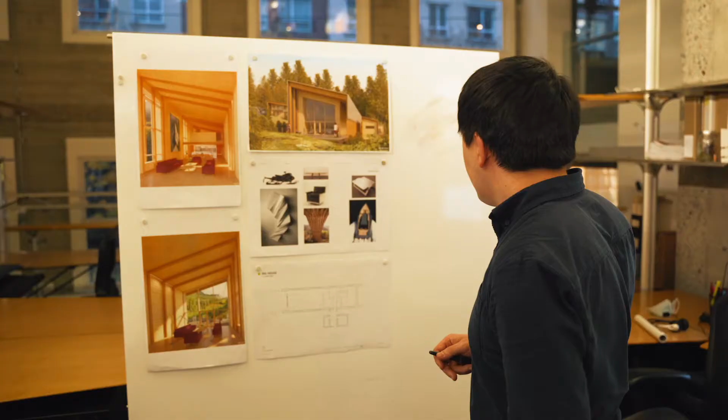Solo was born out of a deeper understanding of the impact buildings have on emissions, climate change, and health and well-being. This project afforded ourselves and the broader project team an opportunity to test ways and means to achieve net zero, both in embodied and operational emissions.

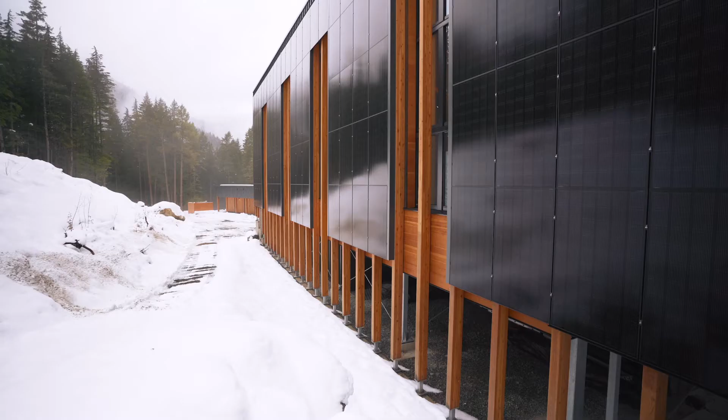Our president, Bruce Langereis, has coined the name Solo as a nod to its isolated location in the lower Soo Valley, but also as a reference to its zero emissions profile and the fact that it stands alone as a one-off example as a future way to build. Solo represents a new way forward for Delta land development and is a catalyst to help accelerate change in the broader development and building industry.

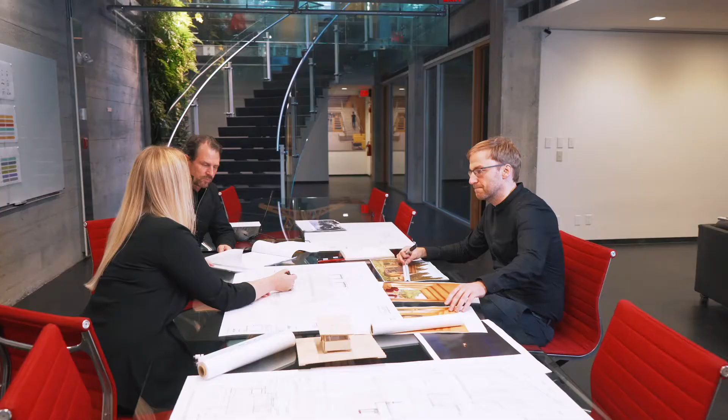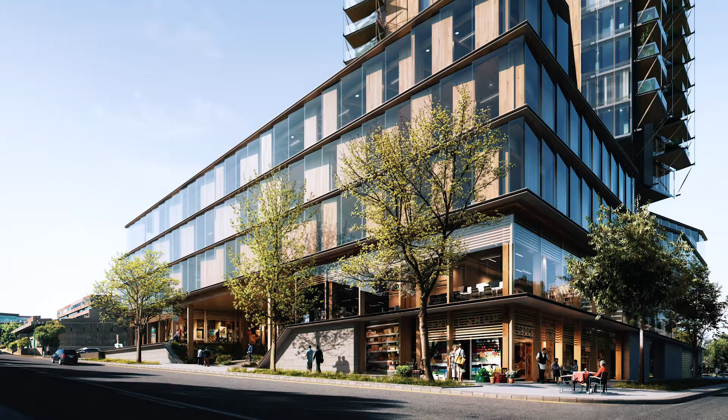Delta was looking for an architect that shared their alignment of values, and that's what led them to reach out to us. Our studio, Perkins and Will, are really known for our reputation in environmental stewardship. We started our work with Delta by creating an overarching set of principles and goals that would lead every decision made on the project. Delta wanted to test out not just the mass timber construction methods that had been proposed for Canada's Earth Tower, but also the broader set of principles and goals around holistic design.

This includes everything from eliminating harmful materials used both in construction and finishes, minimizing our energy consumption through high-performance appliances and fixtures, while also generating energy on site, and reducing emissions. The building structure is beyond carbon neutral, and the building does not rely on combustion for operations. Solo is a proof of concept. It proves that buildings can counteract their negative consequences and act as a source of repair.

Delta wanted an open layout, something that would serve both as a single-family home, but also be able to host large groups for events, gatherings, and educational purposes. Beyond just a house, Delta really wanted to make a statement. They wanted something with wow factor, something that would celebrate the natural beauty of the site and prove that building sustainably and to the Passive House standard doesn't mean sacrificing design aesthetics or beauty.

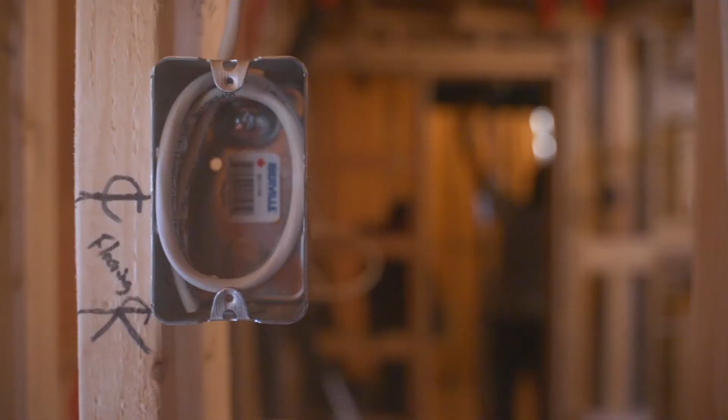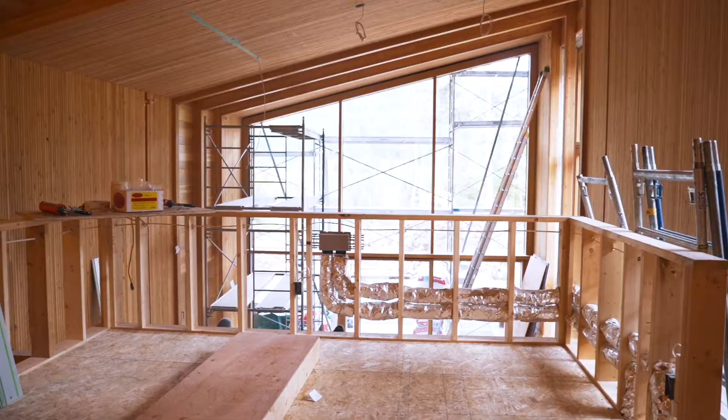The remote location of the site drove all of the design decisions, from building siting and construction methods to the interior finishes. The remote nature of the site led the project naturally towards prefabrication and modular construction methods. This allowed the panels to be built off-site in the shop during the winter months, and then to be erected quickly on-site during the shortened building season.

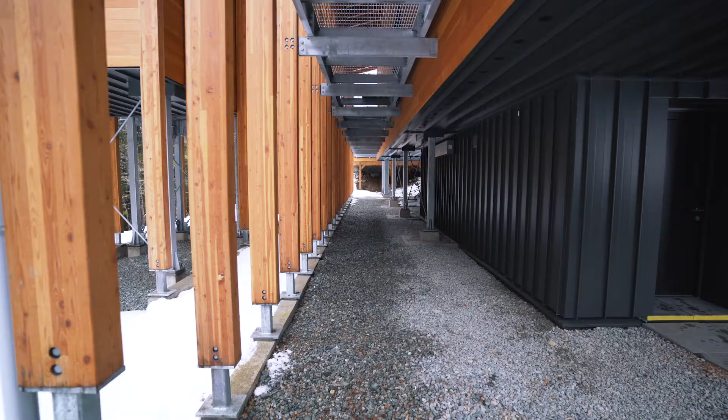We designed Solo to have a performance-led aesthetic. It contains a limited material palette and contains architectural features that are authentic and unsentimental. The building sits on a raised platform above the uneven terrain of the site. It touches the ground lightly and allows nature to remain the focus. As you walk up the front steps, the covered walkway frames a view to the mountains beyond.

Wood was chosen as the primary structural material. It was the obvious choice to reduce our carbon footprint, but it also provided flexibility for the prefabrication of the modular panels.

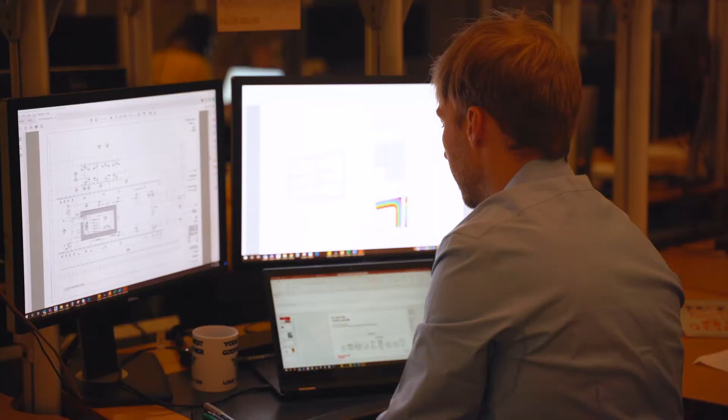The temperature in Soo Valley can get below minus 30 degrees Celsius in the winter and can reach levels above 30 degrees Celsius in the summer. So given these climate extremes, ensuring that the occupants are warm and comfortable in the winter and then adequately cool in the summer is very important.

So as an off-grid system, the building must be self-sufficient. Designing a high-performance building enclosure using passive house principles reduces the need to rely on complex mechanical systems. This results in a more resilient building, irrespective of outdoor temperatures or in the event of extended power outages.

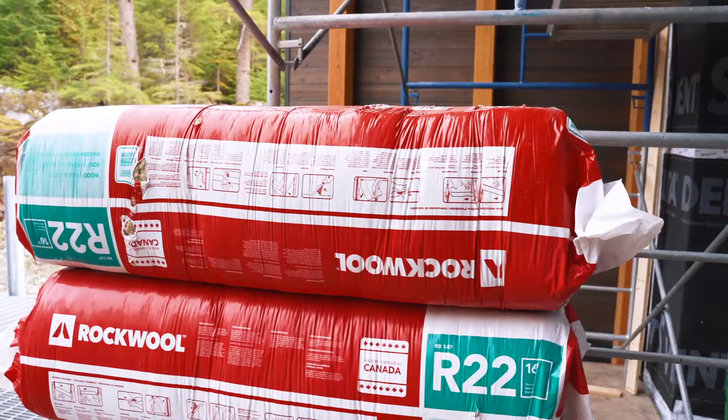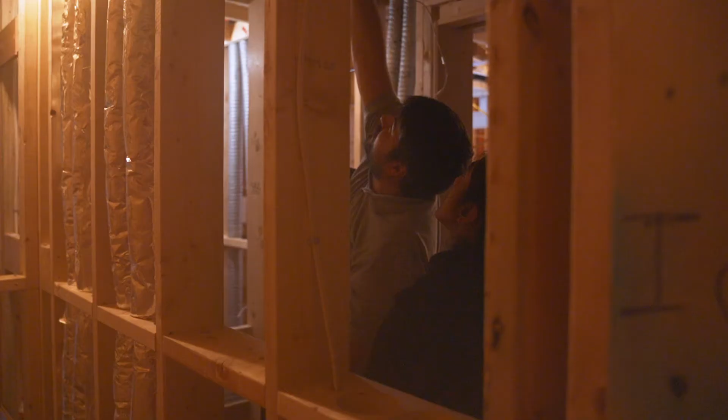Thermal comfort is guaranteed through a thick 2-foot layer of mineral wool insulation that wraps the mass timber structure, in addition to high-performance triple-pane glazing systems. Detailed thermal bridge calculations are carried out at design stage, and an air tightness blower door test is done at construction stage. These measures minimize heat loss, eliminate drafts, and reduce the risk of condensation buildup.

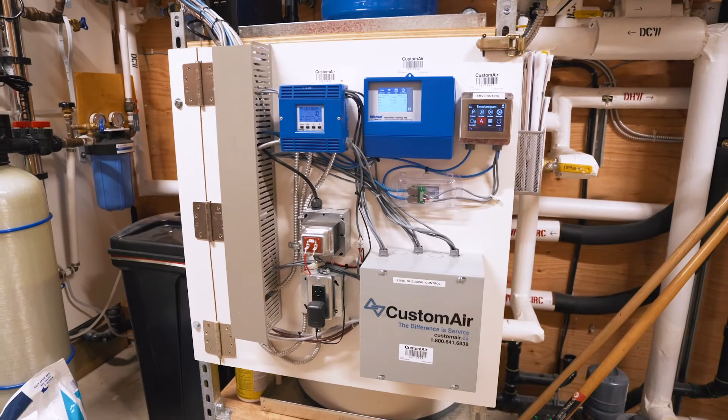The glazing design is optimized to maximize views to the valley outside and promote daylighting, while allowing sun in the winter and eliminating solar gain in the summer. A high-efficiency heat recovery ventilation system ensures a constant supply of fresh air, while recovering waste heat from areas like the kitchens and bathrooms. Natural ventilation is used for cooling in the summer, with windows judiciously sized and placed to promote cross-ventilation.

The small heating demand in winter is provided for by a radiant underfloor heating system. This is fed by a ground source heat pump that uses energy from the sun that is stored in the ground as heat. Energy is generated on site through the use of 103 solar panels mounted on the south facade. The vertical mounting allows the PV system to remain clear of snow in the winter when energy generation is crucial.

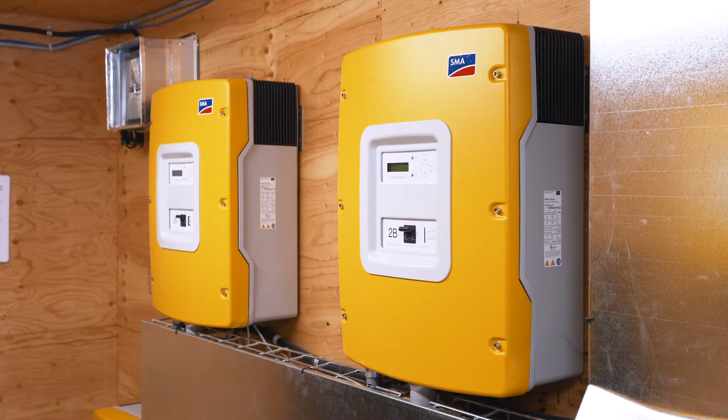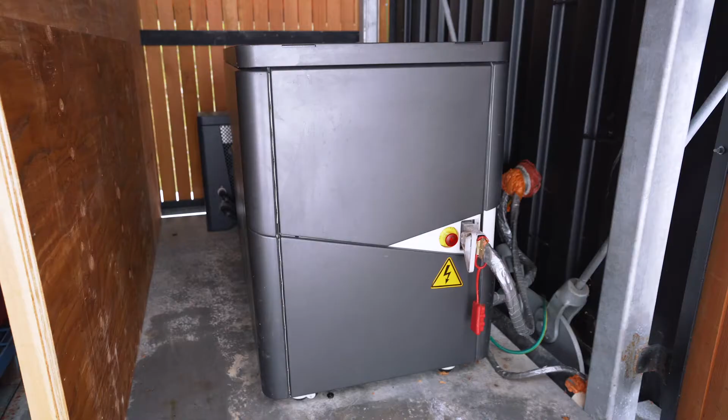The PV system links back to a set of batteries which store the energy generated. Being an off-grid site, we need a backup power source. This is provided for by the hydrogen fuel cell. This means that the building does not consume fossil fuels, nor does it require combustion to operate.

This results in a self-sufficient house that generates more energy than it uses and goes beyond net zero energy. It tackles both embodied and operational carbon and creates an innovative model for buildings in the face of the climate crisis.

The construction and operation of buildings contributes nearly 40% of global CO2 emissions, and it's broadly accepted that this has to change. Solo was our first opportunity to explore ways and means to get to a truly net zero outcome and radically improve on what has been done before.

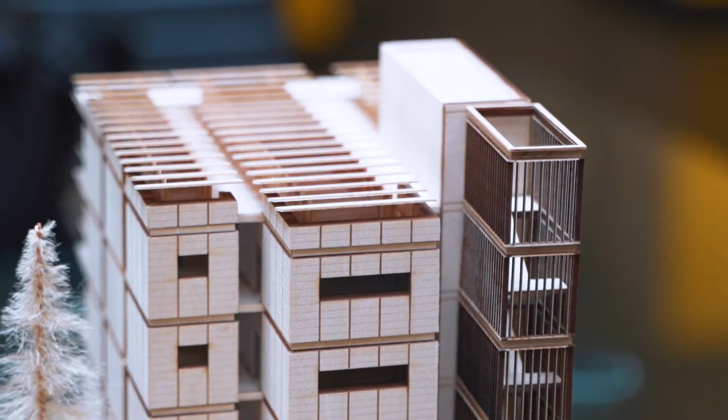At Delta Land Development, we've embraced a philosophy that prioritizes health and well-being, with environmental stewardship and building performance at the core of every development we undertake moving forward. As an industry, we need to develop projects that not only look at reducing the impact on climate change, but actually act as a source of repair. For example, through sequestering carbon in the structure, as we've done here at Solo through the use of mass timber.

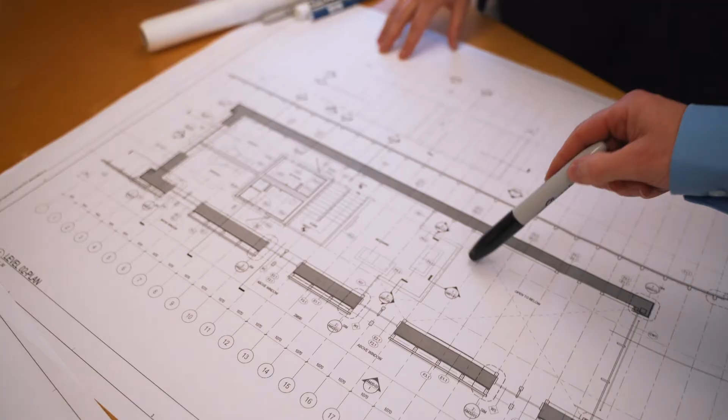Incremental improvement is no longer good enough to get us to where we need to be, and it all boils down to a choice. As we found here building Solo, there's no technical or even commercial impediment to achieving a deeply sustainable outcome, but also maintaining function and aesthetic in the process. Adopting principles such as passive house and the use of mass timber not only help reduce energy and emissions, but also significantly increase the quality and resilience of the building.

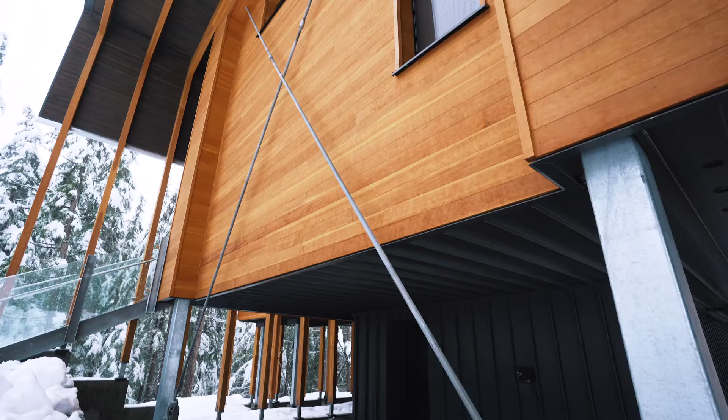A story in the making, at the start of something, later than we could uncover.

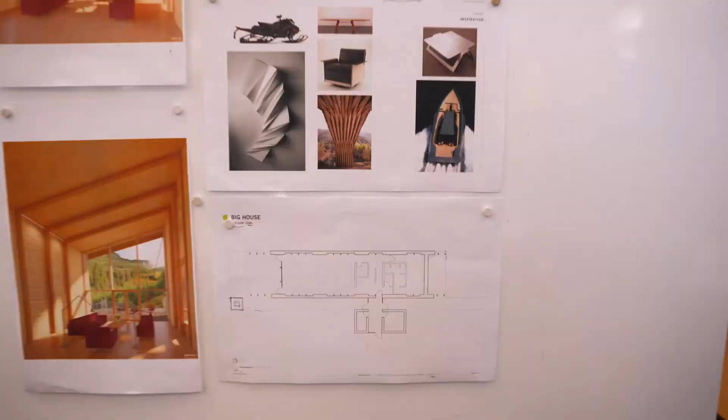There really is no downside to adopting a high-performance building approach. Design excellence is maintained, quality and resilience is heightened, and the experience within the house is not only healthier and more enjoyable, but better in every imaginable way. Not only have we achieved the goals we set forth at the outset of the project, but we've learned a lot along the way, including that we need to focus on simplifying ways and means to achieve a deeply sustainable outcome.

Rising sun hits the sky. Take these hopes and hold them high. Every time you live in color, heaven knows that we'll discover a story in the making, at the start of something later than we could uncover. Holding on to all this wonder, a story in the making. The world is ours for the taking.